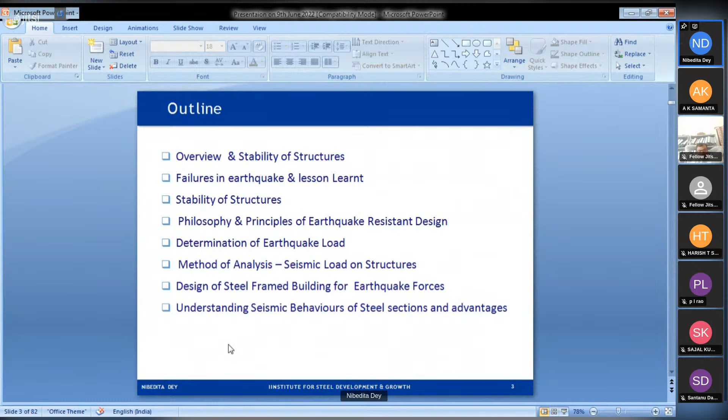First, I will introduce some theories behind the formation of earthquakes, how they occur.

Generally, earthquakes occur along fault lines, cracks in the earth's crust where tectonic plates meet. They occur where plates are subducting, spreading, and slipping, and it is not predictable when this would happen. As the plates grind together, they get stuck and pressure builds up. Finally, the pressure between the plates is so great that they break loose.

The tectonic plates are always slowly moving, but they get stuck at the edges due to friction. When the stress on the edge overcomes the friction, there is an earthquake that releases huge energy in waveforms that travel through the earth's crust and cause the shaking. That is when it can be felt, and that is when we understand that we are having an earthquake.

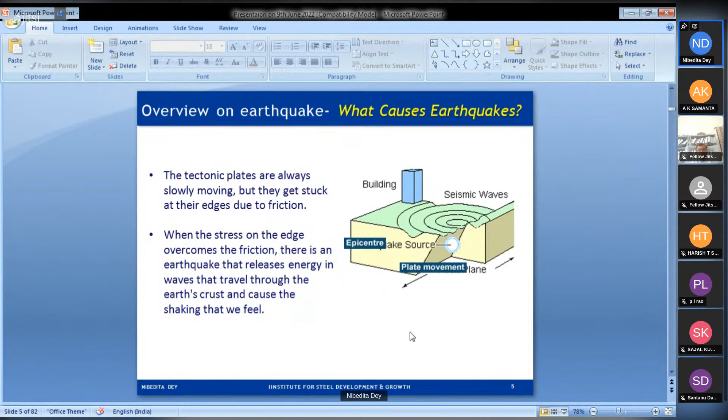Some past earthquakes caused damages and loss of lives. Among the two biggest major earthquakes in respect of death and damages, we can remember the Latur earthquake of 1993, which was considered to have occurred in a very stable region. Generally we think earthquakes occur only in loose soil, but this changed views after the Latur earthquake. It was a very stable zone, but still we felt these major earthquakes.

After the Gujarat earthquake of 2001, many wrong conceptions which were earlier there, that buildings of U shape or L shape are preferable as the different arms in orthogonal direction may give stability, have been proved wrong.

After the earthquake, people who analyzed the effects felt that steel is most suitable for earthquake resistance, as it has the ductility property. Wood is also good for seismic structures due to its lighter weight, but it does not have the ductility property as compared to steel.

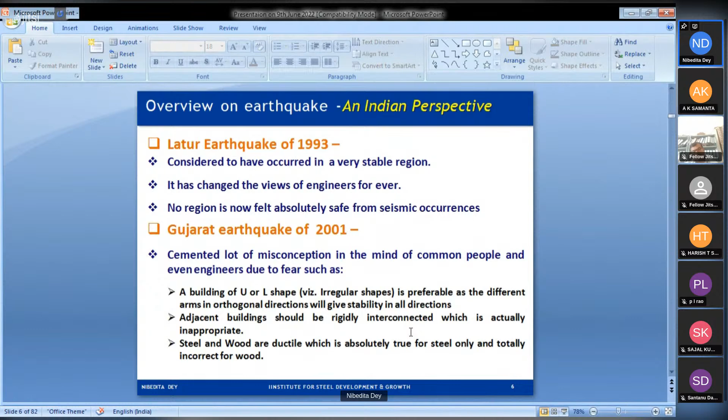It has been proved that even in the low occurrence of earthquakes, structures should have some capacity to resist, so that they should not damage our lives.

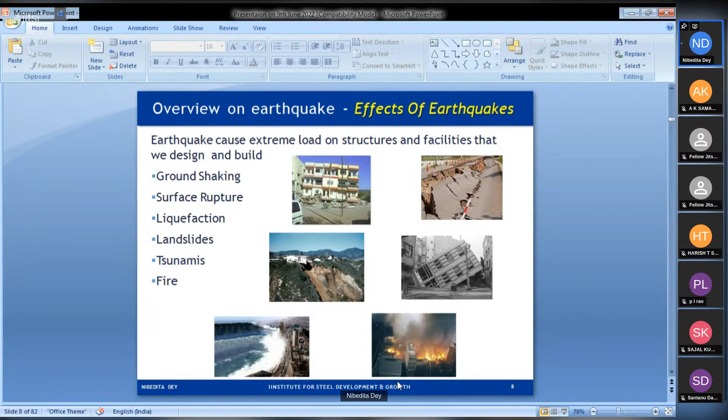So we cannot predict and fully resist all these forces and damages, but we can at least take steps to design buildings to resist to some extent the damages and collapse of human-built structures. Here are some pictures of earthquake failures.

Some steel failures in RC buildings. You can see the failures of corridors, and here you can see the failures in the bracing and the column itself.

Here is a total collapse of one story. Here is a failure due to soft story in the ground floor. Here the failures of bracings, and it is total failure due to liquefaction.

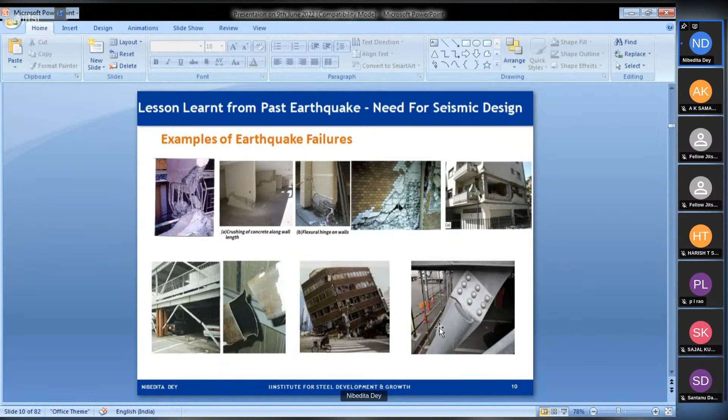Here are some more pictures of the failures. Generally, after the earthquake, when we see the failures and damages, we start to study what the causes are and how structures can be protected in future. So there is a need to study earthquake damages. It provides invaluable information on the performance of real structures under actual earthquakes. It is like a full-scale testing of a variety of prototype structures under real earthquakes.

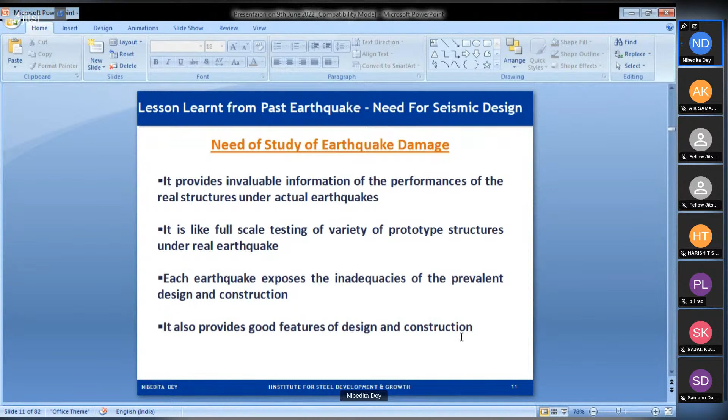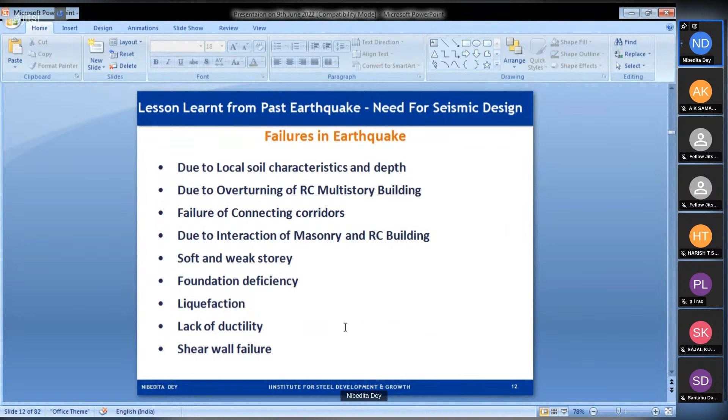Each earthquake exposes the inadequacies of the prevalent design and construction, which we can rectify in our future design. It also reveals good features of design and construction. Failures in earthquakes can happen in many ways: due to soil characteristics and depth of foundation, overturning of RC multistory buildings, failure of connecting corridors, interaction between masonry and RC buildings, soft and weak stories, foundation deficiency, liquefaction, lack of ductility, and failure in the shear walls designed for lateral load.

Now, what can we do? If we design all structures for a massive earthquake, our design may not be economical, because a severe earthquake is not likely to occur frequently during the life of the structure. So we have to judge when designing structures for any earthquake, to resist earthquakes which are not very high but create huge damages. The structure does not collapse, but we see damages which we will be able to repair. So we have to think how to take steps for both types of design.

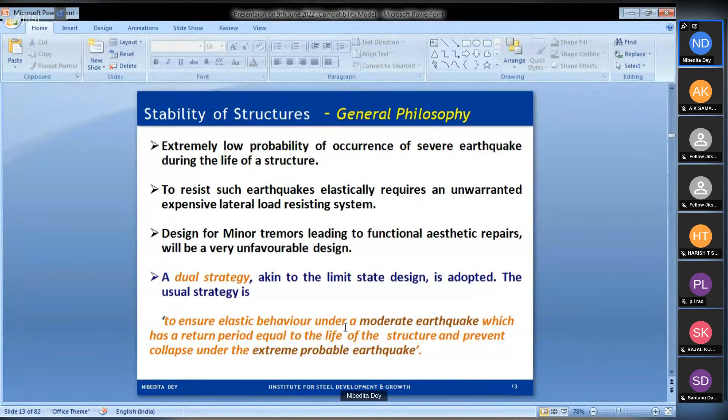So we have to ensure elastic behavior under a moderate earthquake, which has a return period equal to the life of the structure. A moderate earthquake may happen two or three or more times during the life of the structure, but a severe earthquake doesn't have that frequent a return period. So we have to prevent collapse under the extreme probable earthquake, allowing some damage before collapse. We have to ensure the ductility property that allows large deformation without collapse: the ratio between the ultimate deformation at an assumed point of collapse and the deformation at yield point, which means the ductility. I will explain more about ductility in later slides.

Another term we need to understand is hysteretic energy dissipation. It is the energy dissipated by inelastic cyclic deformation. When earthquake load is acting on the lateral load systems, any member first gets loaded and is subjected to some deformation. Like when we plot the stress-strain curve, at first the member is elastic and follows a linear line. After some time it reaches the yield point, and after the yield point, when loaded again, the curve flattens, and at some point it will be flat.

In an earthquake, the load is reversed. At some point the load is in the right direction, then after some time it is in the left direction, the opposite direction. So when the member is loaded on the other side, the curve is on the other side. When it is cycled like this, the area covered by the cycle is the work done, the energy dissipated by inelastic cyclic deformation. This area is very much required for energy dissipation in a lateral load resisting system during the earthquake. It is given by the area within the load-deformation curve, called the hysteretic curve.

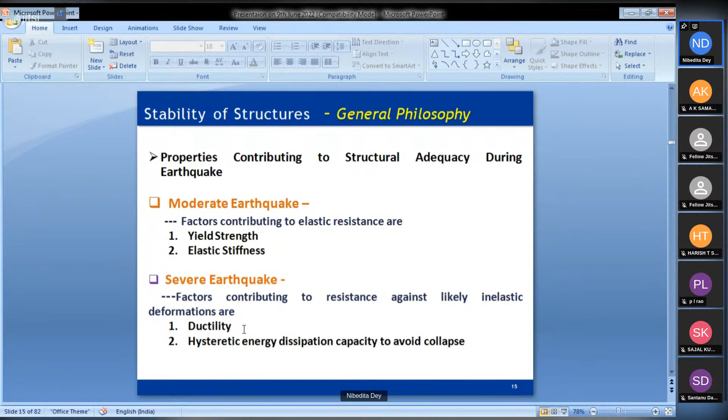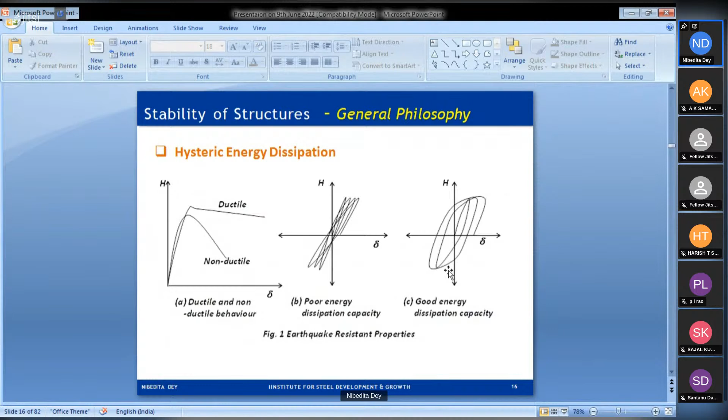Figure 1B shows poor energy dissipation capacity; the cycle lines are very close to one another, so the area under the full curve is smaller. In figure 1C, the area under the hysteretic curve is larger, which means it has good energy dissipation capacity. An earthquake generates energy, and that energy has to be dissipated by the members resisting the earthquake loads, so good energy dissipation capacity is required. One more thing: these curves are taken from different experimental results in some institutes, then included in the literature.

Figure 1B shows the poor energy dissipation capacity, and the structure is likely to collapse due to low cycle fatigue. There is a strength and stiffness degradation under the repeated inelastic cycles, and it is called low cycle fatigue. It is to be ensured the structure is able to dissipate a large amount of hysteretic energy in each cycle, which can minimize the low cycle fatigue effect.

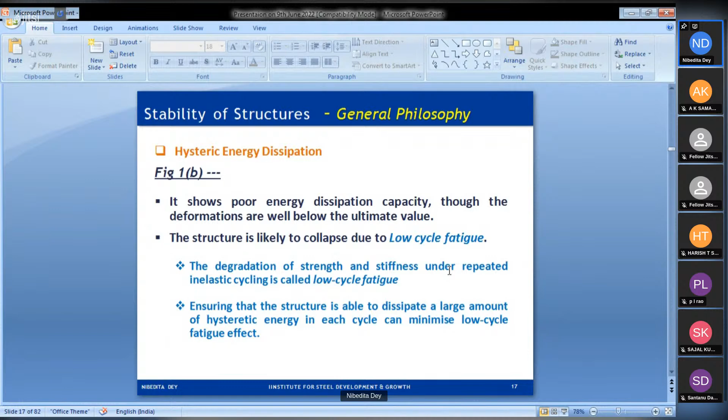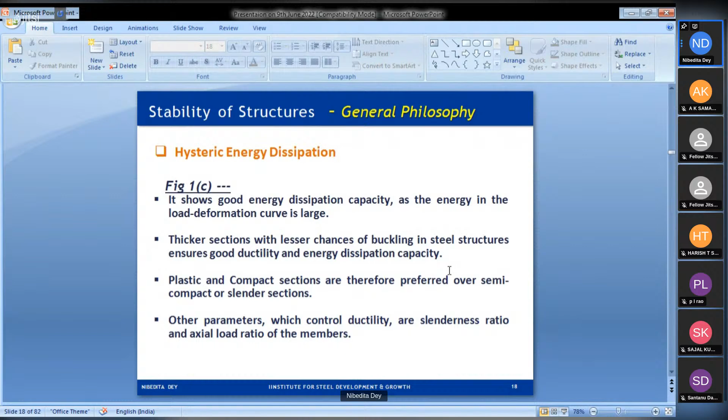Figure 1C: from this, we can tell that a thicker section, which has less chance of buckling in a steel structure, shows good ductility and energy dissipation capacity. Plastic and compact sections are therefore preferred over semi-compact and slender sections. The width to thickness ratio gives the plastic and compact property of sections, and those sections we have to choose. Other control parameters, that is the slenderness ratio and axial load ratio of members, are also required for energy dissipation.

For earthquakes, we need to design our building such that the mass of the structure is less to some extent. Earthquake force is proportional to mass. The greater the mass, the more earthquake force it will attract. So in this regard, RCC structures also resist earthquakes, but compared to the same RCC building, if we design it as a steel building, the steel building will have lesser load compared to concrete. So it will attract lesser earthquake force for the same earthquake frequency.

We also need to be sure that the structure has some symmetry and regularity in plan direction and also in vertical direction. Because non-symmetric and torsionally unbalanced buildings are prone to earthquake damage due to coupled lateral torsional movement, producing non-uniform displacement demands in the building elements and concentration of stresses and forces on structural members. Also, we have to be sure of the strength and overstrength capacity of a building. This overstrength theory I will explain in the later slides. Ductility has already been explained, why it is required.

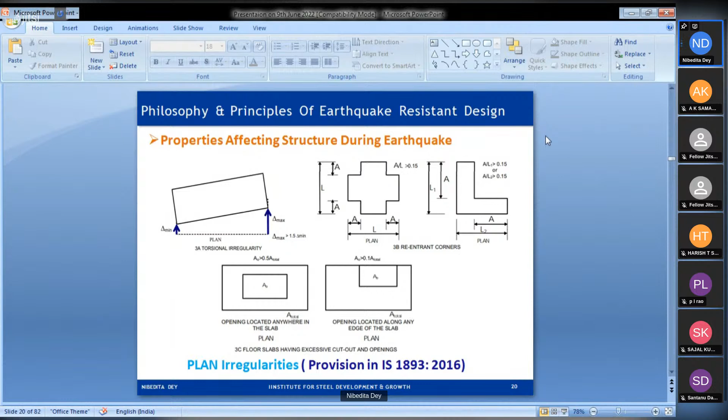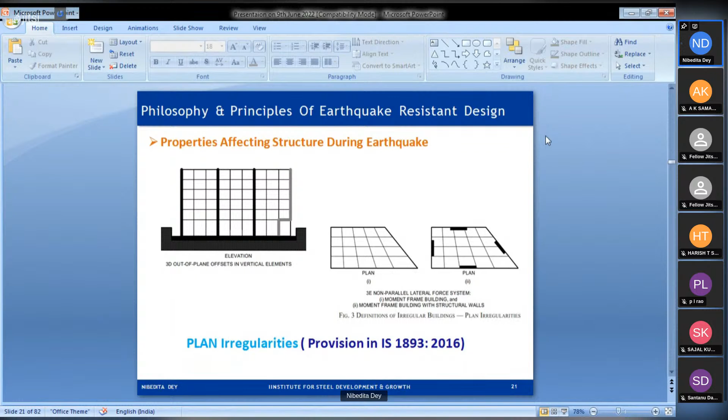Some irregularities in cutouts and floor slabs have also been pointed out in IS 1893:2016. Here again are some provisions for irregularities in plan dimensions. Actually, we have to distribute all the masses in a uniform way throughout the building, and also choose the lateral load resisting system in such a way that its CG is almost coinciding with the CG of the mass, so that there is no eccentricity. Practically, it is not possible many times. For that, the code has given guidelines on what extent of eccentricity we can take. That I will explain in a later slide.

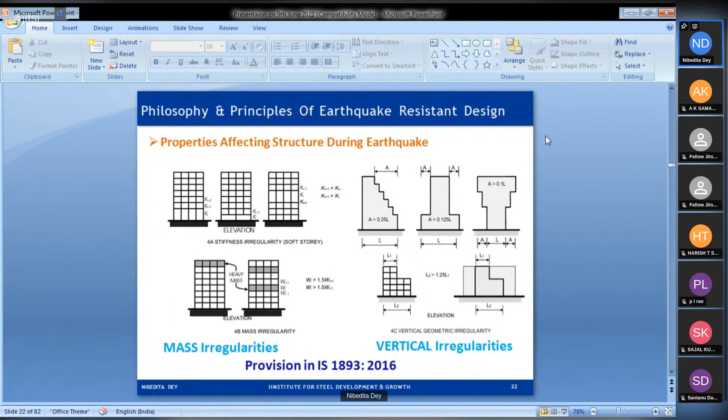There should not be any mass irregularity also. We will try to distribute the mass as uniformly as possible. Lateral, here you have seen that in elevation, in the second picture, there are floating columns. So floating columns should be avoided.

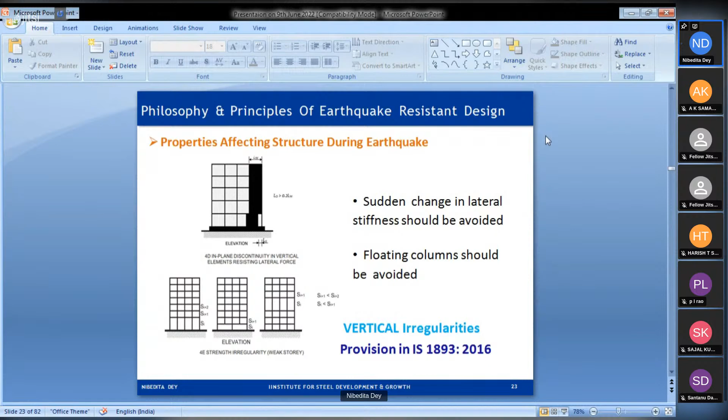In some buildings, floating columns are provided, maybe due to some architectural restrictions, but first it should be avoided. Even when it cannot be avoided, we should design the floor from where it started, and maybe we will choose the adjacent floor if we can provide a truss system between two floors, and the space between these two floors can be accessed for the service lines. In some high-rise buildings, this system is followed when floating columns cannot be avoided due to architectural planning.

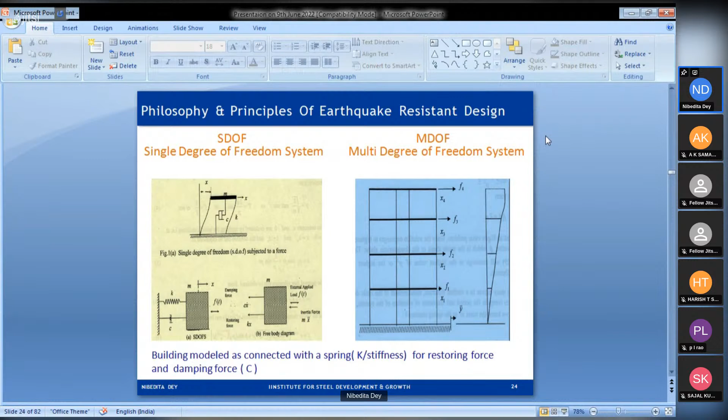Here, a schematic diagram, that is the mass of the structure is lumped at top, shown as M, and the ground acceleration, that is UG, and the structure is displaced due to this vibration. The relative displacement between ground and the mass is the value of U, and UG is ground displacement.

And now we are writing the equation of motion, that is M U double dot. U double dot means the acceleration. C U dot, U dot is the velocity. C is the damping, and K is stiffness into the displacement. So all this together should be resisting the earthquake force. And we use the eigenvalue problem to solve the equation of motion in earthquake analysis.

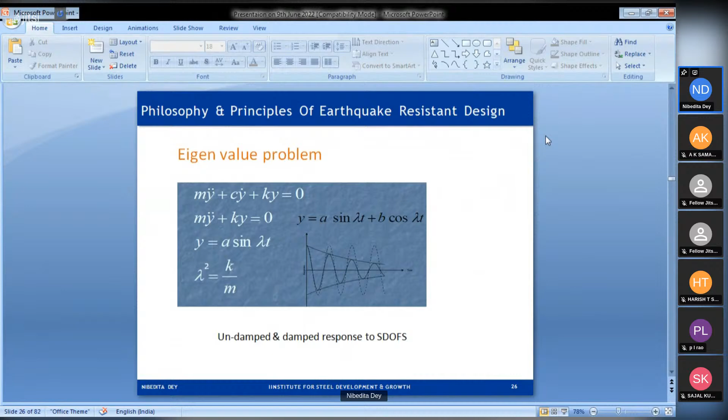Oh, this slide, I think it is repeating. By mistake, the slide has been repeated.

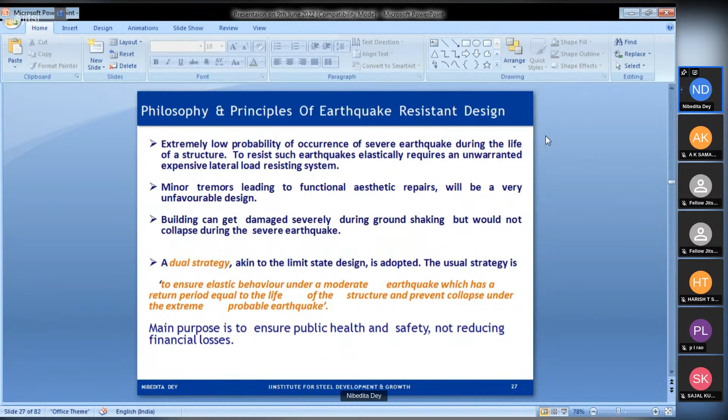Already we have explained that we have to design the structure for the earthquake; for moderate earthquake, the structure should be elastic enough in its return period. And for severe earthquake, we have to allow some damage, but not collapse. We have to ensure the health and safety of the public, and not only reduce the financial losses.

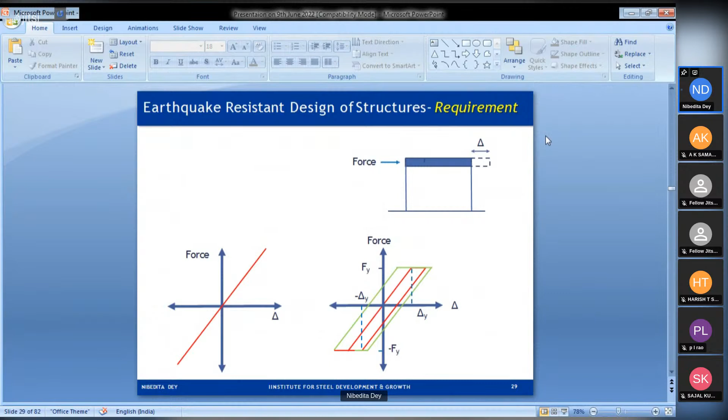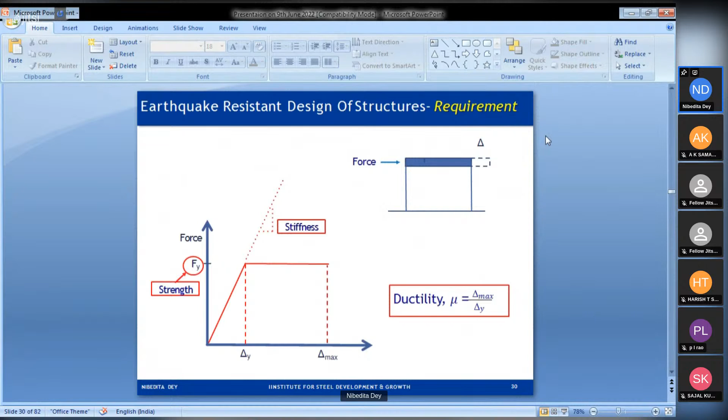How to design for an earthquake load? First, for earthquake load, three things we have to keep in mind. Only choosing the material is not sufficient. Only choosing the lateral load resisting system is not sufficient. We have to also ensure the level of detailing useful for seismic analysis. So we depend on the ductility of the material, ductility of the lateral load resisting system, and the ductility of the connections in buildings.

There are 3 types of ductility we have to ensure. Here you can see the curves for steel members. In the linear part, force versus displacement is linear, that is, stress versus strain is linear. At some point it reaches the elastic point. After that, it goes downward.

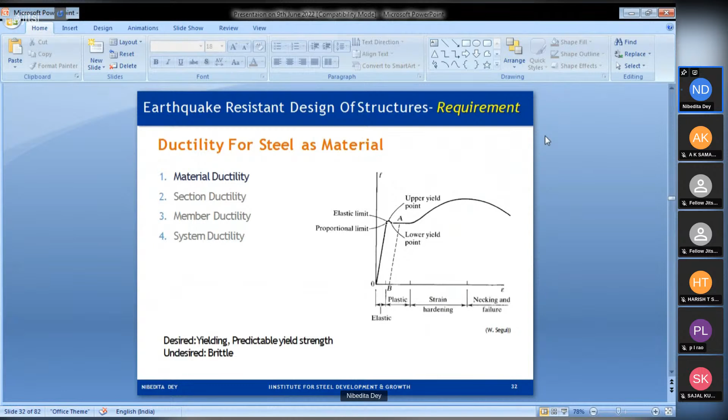Then it gets flattened, reaching the upper yield point. So after the yield point, the zone is plastic. After the lower yield point, the flat part ends. Then there is strain hardening: the load is increasing, the strain develops in the member, and at some point it will fail. So we will choose a member that yields and does not have brittle properties. It will not collapse suddenly.

Then we have to ensure that the section we have chosen, whether it is an I section or hollow section or any other section, is ductile enough, resisting the design earthquake forces we get in a particular structure. Here you can see that when the member is subjected to forces, that is bending moment, for an I section, first the extreme fiber gets stressed due to bending moment. In elastic analysis, we design our member based on reaching Fy in the extreme fiber.

But for the plastic hinge, after the extreme fiber, the next fiber gets stressed to the yield point. Then it progressively reaches the fibers near the neutral axis. Then a rectangular stress block forms, where all the fibers in the compression zone and tension zone are at yield. At that point, the section has reached the plastic hinge point, and the section may rotate. So we have to ensure that our member will not collapse or fail, but will form a plastic hinge.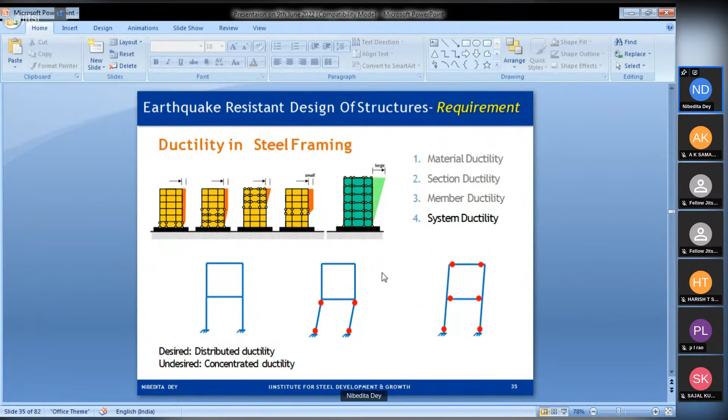Another point we have to analyze in earthquake resistant structures is the response reduction factor. What is that? It is an indication of the extent to which energy is dissipated through inelastic deformation during seismic excitation. In elastic analysis, the force versus displacement curve is straight. For the maximum displacement, the force causing it is V elastic, and we design the structure corresponding to delta Y, the yielding point, which gives V design. The R factor is V elastic divided by V design.

Before designing structures, we think about how much damage we can allow, because for a severe earthquake, designing the structure to be fully robust may not be economically feasible. So we have to use our judgment and design the structure according to the response reduction factor. It depends on the framing system, material, everything. The code gives values for different moment frames and braced frames, different for RC buildings and for steel buildings.

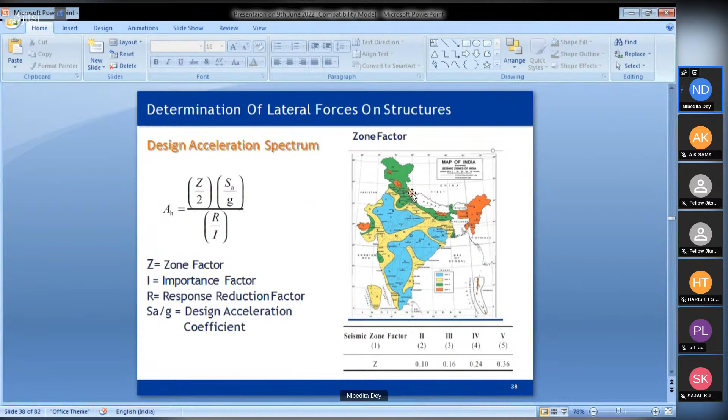Z is for zone factor. We have 4 zones now to be considered in seismic design: 2, 3, 4, and 5. Importance factor depends on the building type. Response reduction factor depends on the building framing system, that is moment frame or braced frame. And the design acceleration coefficient depends on the soil type, whether it is hard soil or loose soil, and also on the natural time period of the structure.

Here you can see the response reduction factor in IS 1893. It gives some factors. Why have I marked it red? Because in this webinar we are concentrating our presentation on steel buildings, so we have highlighted it this way. You can see that for a steel building with ordinary moment resisting frame, our response reduction factor is 3, and for a steel building with special moment resisting frame, the factor is 5.

That means when our load is about some value V, we reduce the value by 1/3 for a steel building with ordinary moment resisting frame, and we reduce the forces by 1/5 for special moment resisting frame. That means the special moment resisting frame is the more effective system for earthquake resistant structures. And similarly there are values for braced frames: building with ordinary braced frame, building with special braced frame, and building with eccentric braced frame.

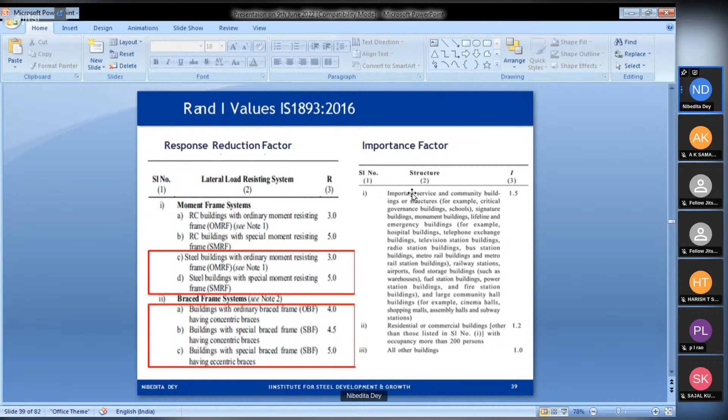And some values of importance factor are also given for the use of the building, for the importance of the building. For residential or commercial buildings it gives a value of 1.2, but for other buildings like a rail station, where damages and toll of lives may be greater for any collapse, the importance factor is 1.5. That is, we have to design for more earthquake forces. But for other general buildings, we can use the importance factor as 1.

Here are 2 Sa by g curves. One is the spectrum for the equivalent static method, which we will explain in the later slides. And the second one is for the response spectrum method. Design acceleration coefficient Sa by g.

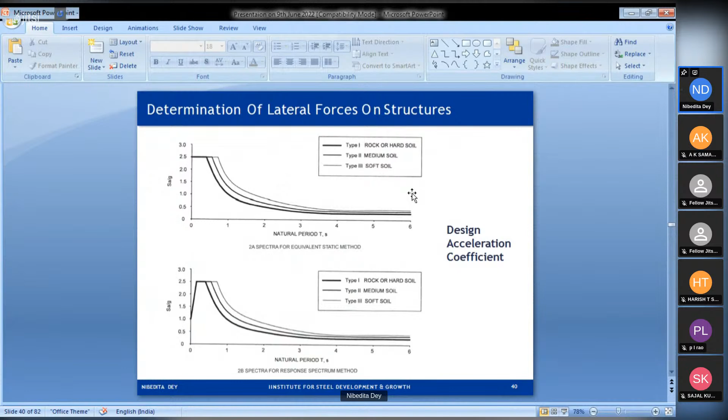Now, method of analysis for seismic loads. The code has specified 2 methods for earthquake load analysis. One is the static analysis method and the other is the linear dynamic analysis method. The static analysis method is the equivalent static method, and it is applicable for regular buildings less than 15 meters in seismic zone 2. And also we have to see whether the natural time period of the structure is less than 0.4 or not.

The linear dynamic analysis method is not required for regular buildings less than 15 meters in seismic zone 2. In other zones, seismic zones 3, 4, 5, we have to analyze the structure with linear dynamic analysis. For linear dynamic analysis there are two methods, that is the response spectrum method and the time history or site specific method. Another is non-linear dynamic analysis. It is not included in the provisions of IS 1893.

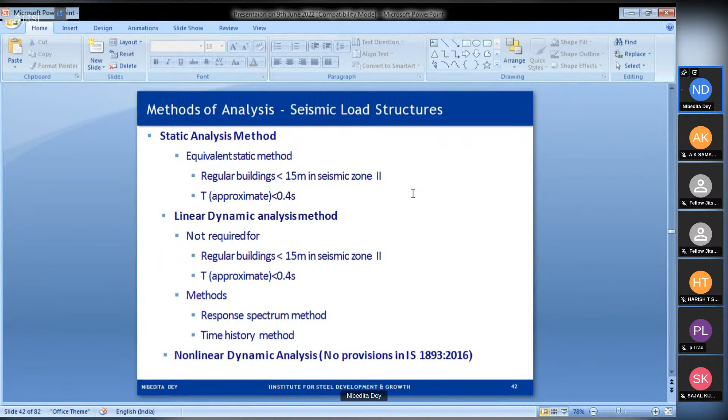In the equivalent static method, the Ah value is the same as we have seen in the earlier slide, that is Z by 2 into Sa by g by R by I. And the minimum design lateral force VB is equal to Ah into the seismic weight of the building. After getting the seismic weight of the building, we have to distribute the seismic force to each floor depending on the formula for Qi, which depends on the individual weight of each floor and the height of the respective floor from the ground level.

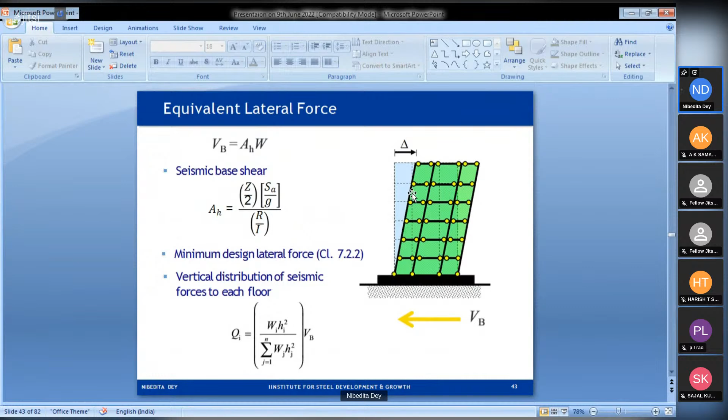And in linear dynamic analysis, the structure is analyzed for several vibration modes. The structure is supposed to vibrate in different modes, like the first mode of vibration, second mode of vibration, third, and many other modes. So all these modes are considered in linear dynamic analysis.

The code has specified that the design base shear calculated using linear dynamic analysis, VBD, should not be less than the design base shear calculated using the fundamental natural period Ta in the equivalent lateral force method, VBS. VBD should be greater than VBS, and if VBD is less than VBS, the force response quantities shall be multiplied by the factor VBS by VBD. And all the story shears, base reactions, all these forces will be multiplied in the same ratio.

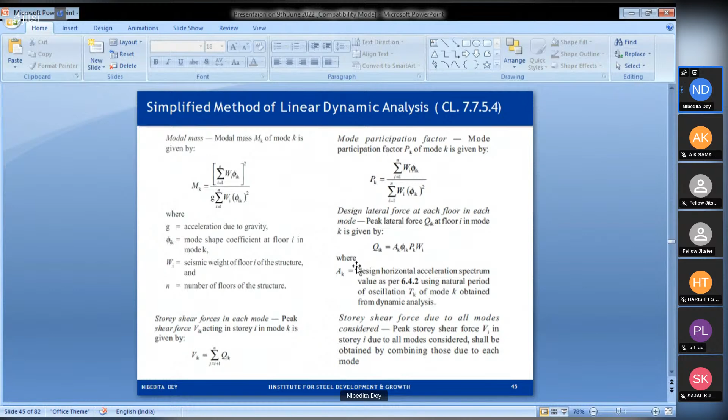Here, the design acceleration spectrum for response spectrum method. The difference with equivalent static method is that for zero natural period, in equivalent static method there is a fixed value of SA/G, that is 2.5. But here it is lesser than 2.5, and it is also increasing from zero as the value increases. Sometimes we use site specific design acceleration spectrum depending on the requirement of the structural design and the project.

The code has specified that when we are using a number of modes in a direction, the sum of modal masses contributing to earthquake force generation should be 90% of total seismic mass. After the software analysis, we can see from the output all the modal masses in each mode - the total modal masses should be 90% of total seismic masses of the building.

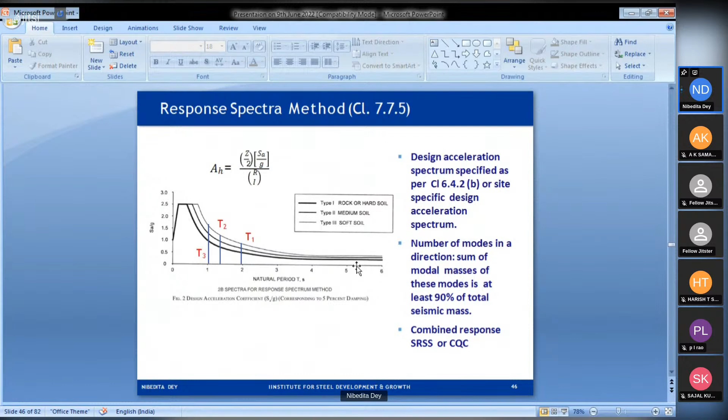Another system we have to ensure is that when designing the lateral load resisting system, the earthquake forces are finally transferred by this system. But how do these forces go to the lateral load resisting system? For that, the building floor needs to act as a rigid diaphragm in the lateral load resisting system, so that force is transferred from one framing column to another through the building floor slabs, and this is most effective when the building floor acts as a rigid floor.

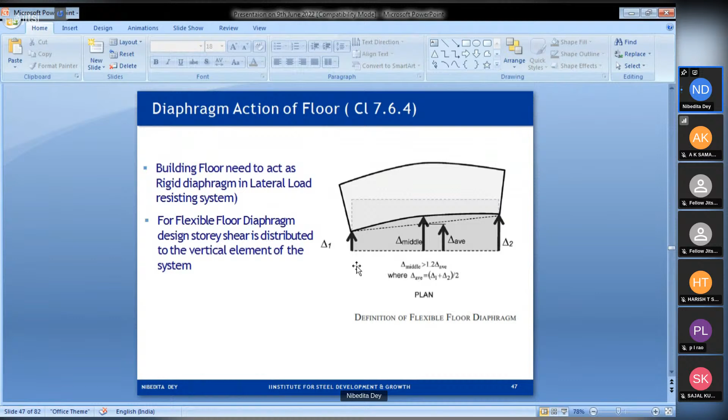If it is not possible, if it is to some extent flexible, we have to check how much it is flexible. The code has guided us to check flexibility of the floor diaphragm, what value is allowed. In the figure, the delta middle displacement of the floor should be greater than 1.2 delta average. So we are allowing that flexibility of the diaphragm to be considered in lateral load resisting system design.

One point we have to ensure is design eccentricity. In analyzing the structure, while giving input, we have to give that eccentricity value. What is eccentricity? It is the distance between the center of mass and center of the resisting system, like where we provide braced frames, shear walls, or any other load resisting system. If we are designing moment resisting frames, we calculate the CG of the lateral load resisting system, which should coincide to the most extent possible with the center of gravity of the mass, so there is no eccentricity and the force acting gets resisted fully.

Even if there is eccentricity, the allowable value given in the code is 1.5 esi plus 0.05 bi. That 0.05 value is for the accidental eccentricity.

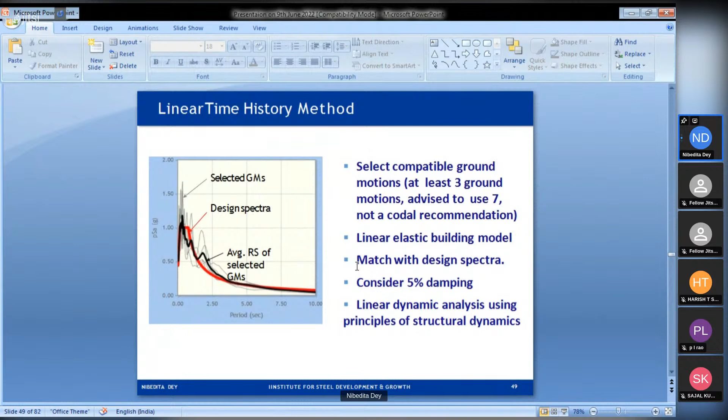Some drift requirement is specified in the code. Why is it required? After an earthquake, we always see some tilting of the structures. Even if there is no collapse, it has been tilted, and it gets damaged when the building, getting tilted, falls on the other buildings. So for that, the pounding effect should be restricted.

What is the pounding effect? It simply means the collision of two buildings due to earthquake load, and it happens due to irregular response of the adjacent floors of the buildings during the earthquake. So to resist that, when we are designing different units of a building or any separate two buildings, some separation should be there.

That separation value is R1 delta 1 plus R2 delta 2. R1 delta 1 is for the first building, and R2 delta 2 is the corresponding response spectrum value and displacement value of the second building.

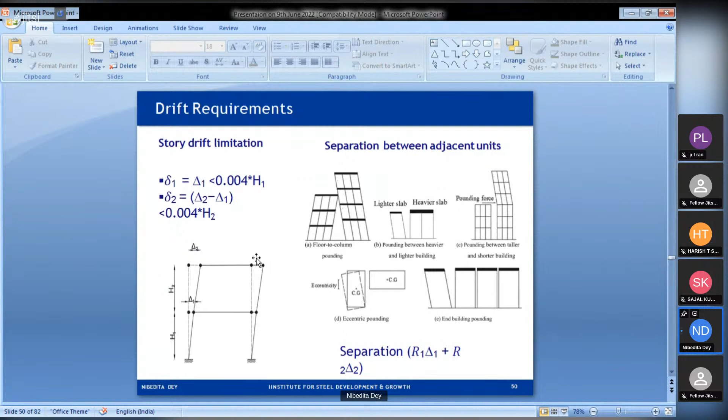Other than designing the lateral load resisting systems for earthquake, all other members which are not acting as earthquake load resisting members should also have the required bending moment and shear force capacity for all the design forces they are acting under.

This is mentioned in clause 7.11.1, and these forces should be delta multiplied by the response spectrum value of that particular building. It is specified to design in this way in zones 3, 4 and 5.

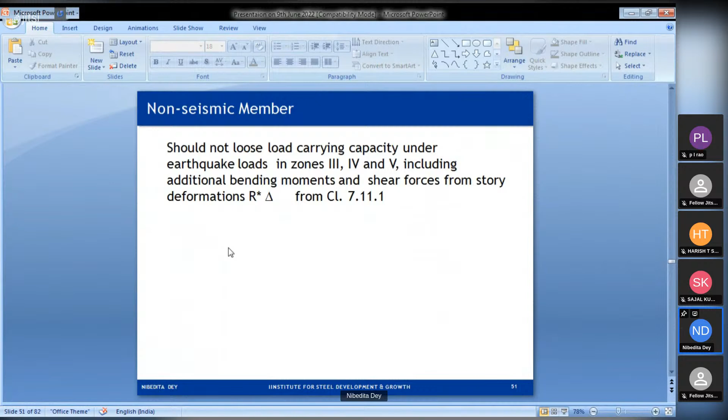So here, in short form, are the clauses we have to remember and follow for the earthquake load resisting system. Horizontal diaphragm design, as explained in the earlier slide, is clause 7.4 to follow the 7.6.4 guideline.

Design for horizontal and vertical loads includes the torsion requirement, that is the eccentricity part, and the structural irregularity part in tables 5 and 6. We have to see the projection part also in the planning of the building from the start, and addition to existing structures is mentioned in 6.1.7, along with any change in occupancy that we have to consider while analyzing the building.

In today's presentation, we are restricted to the lateral load resisting system only, but there are some clauses on foundation design for earthquake load analysis, that is clause number 7.12.1, and for compound walls there is a clause in 7.12.3.

The connection between parts is also very relevant in this system design, mentioned in 7.12.4, because sometimes corridors or connecting parts fail during earthquakes because they are not designed for their full capacity.

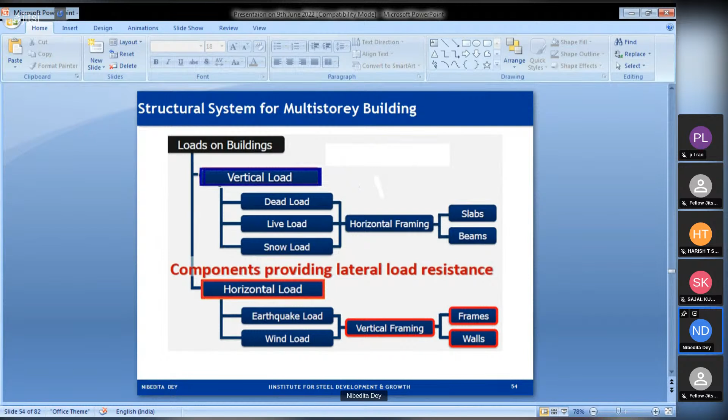There are two types of moment frames: ordinary moment resisting frames and special moment resisting frames. And there are four types of braced frames: ordinary concentrically braced frame, specially concentrically braced frame, eccentrically braced frame, and buckling restrained braced frames.

In special moment frames, beams and columns have moment resisting connections. It resists forces by flexure and shear in beams and columns. In this moment frame design, we always follow the principle of designing the beam such that the plastic hinge forms in the beam first, not in the columns. We follow the theory of strong column, weak beam to resist the earthquake forces.

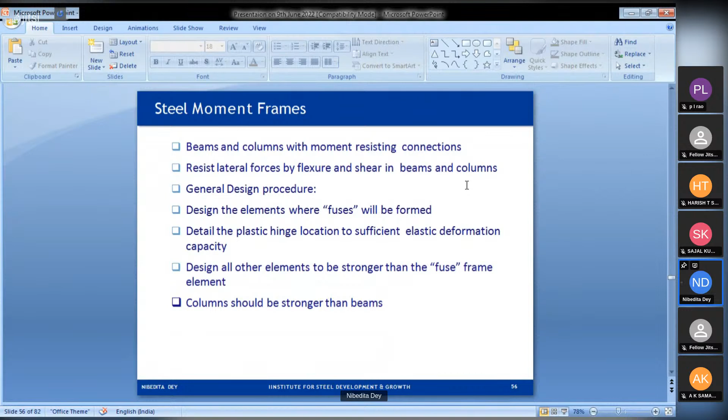Here in the figure, you can see that we are forcing the beam to get the plastic hinge rotation point first, before the column. We have to ensure how we can ensure this.

Sometimes we ensure the hinge formation to be in the beam by reducing the beam flange section at that point, as the beam flange is taking the moment load. So we can reduce the beam flange so that it will reach the plastic moment capacity of that section, it will act as a hinge point. But at the same point, the other sections adjacent to the members and the columns will be designed for more than the capacity of that plastic hinge point, so that all other sections don't collapse or fail before the plastic hinge formation.

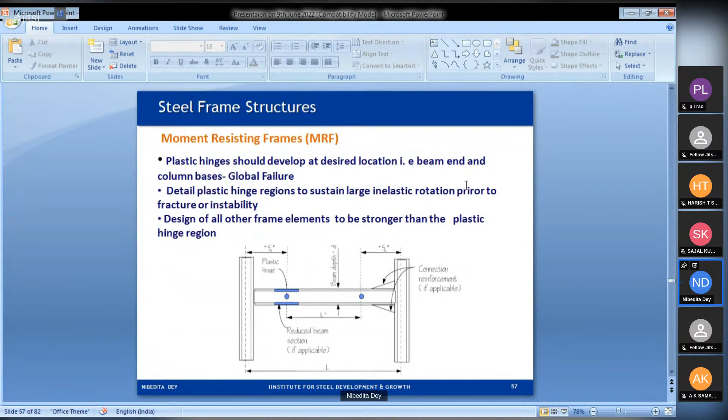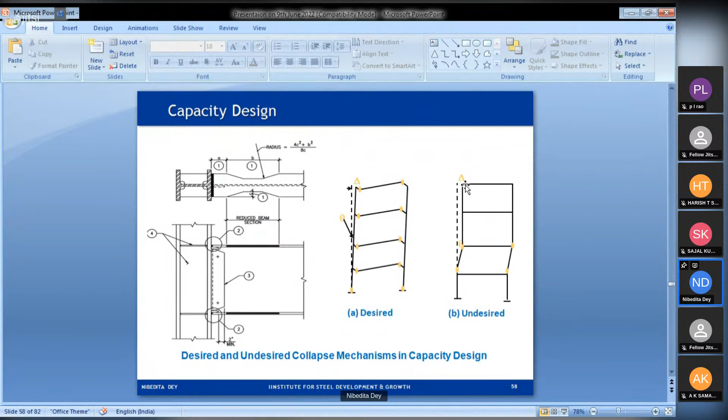And the same concept we have to follow for all the beams for the moment frame used to resist the lateral load resisting system. We will allow all the beam parts of the frame to get hinged first, not the column.

Here, the strong column weak beam theory is explained in the figure. In the left figure, all the beams are getting the plastic hinge formation, so the frame can sway, but it will not collapse. But in the right figure, when the column will get the hinge point, after the hinge point formation, the frame gets collapsed without any indication.

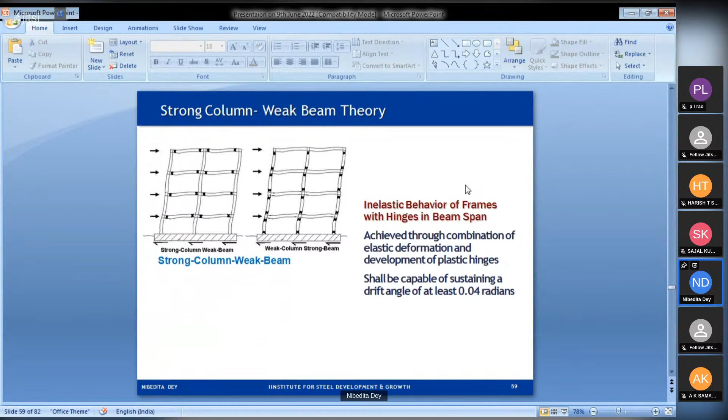Concentrically braced frame is not as ductile compared to moment resisting frames, but again it depends on how important the structure is and in which zone we are designing the structure. Considering all these factors, we choose the structural load resisting system for earthquake. These frames are not as ductile as moment frames, but we can use them in seismic zone 2 and 3.

Eccentrically braced frame is much more effective than concentrically braced frame, as we can have a link between the framing members, that we can use to fail first before all other members in the framing, so that the framing becomes ductile, that is, it deforms first before collapsing.

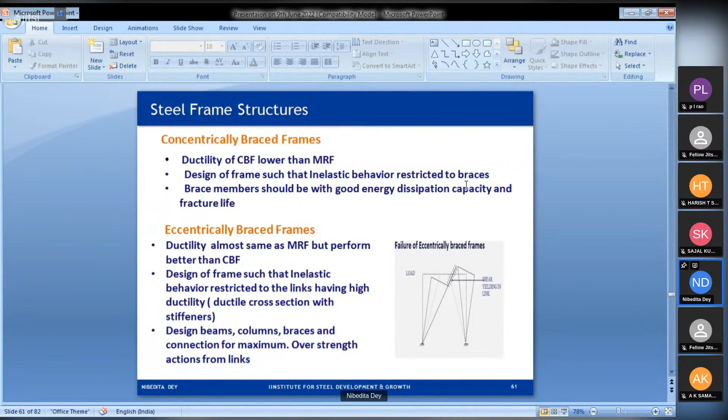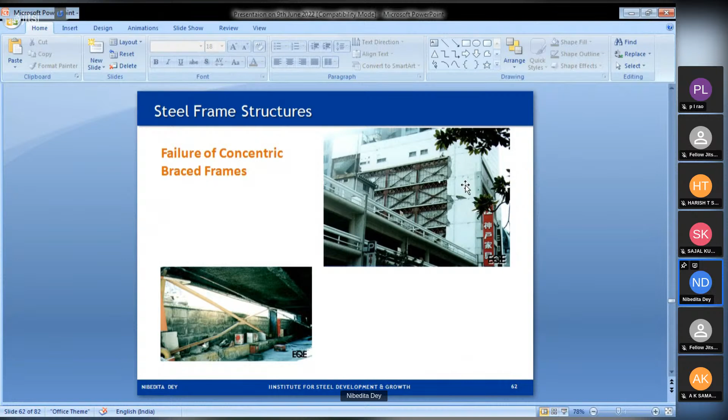Ordinary moment resisting frames, as per clause 12.10 of IS 800 2007, are not allowed in zone 3, 4, and 5, and connections are as per clause 12.10.2. That is, connections are permitted to be rigid or semi-rigid moment connections, and they satisfy all the criteria of 12.10.1.

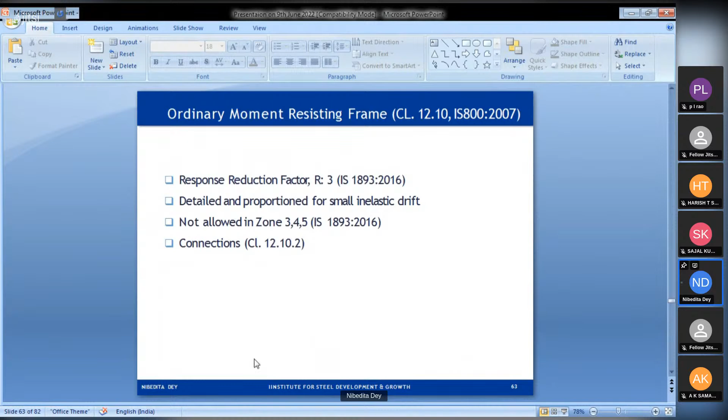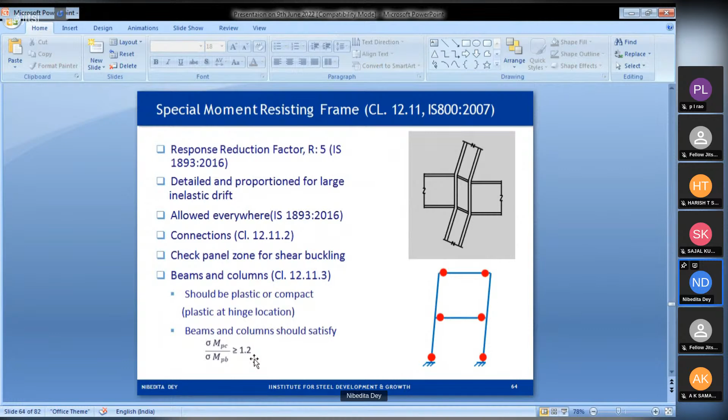And here the design should be such that the plastic moment of column and beam should satisfy sigma MPC by sigma MPB greater than or equal to 1.2. That is, column moment is always greater than the beam moment capacity. That's why the beam gets the plastic hinge point first. And also the shear buckling check is done for the panel zone.

Now it is showing the concentrically braced frame. In this framing, beams, columns, and bracings are arranged to form a vertical truss, and it resists the earthquake forces by truss action.

And here we allow the bracing member to fail first before the other members of the frame, that is beam and column. The bracing yields in tension first before it buckles in compression, so that the structure should not collapse.

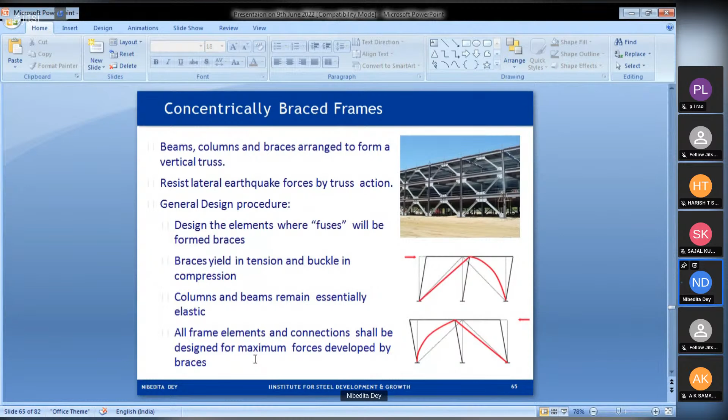Ordinary concentrically braced frames - some provisional code provisions are there: for ordinary braced frames, concentrically braced frames, slender sections are not allowed, and axial compression, which we design the section for, should be less than 0.8 of design forces, and slenderness should not be greater than 120.

As we are saying that it should yield in tension first, that's why this slenderness ratio and this axial compression value is mentioned. That is, P design is the compressive force, and this axial compression is 0.8 times of P design.

And for connections, the connection part should be designed as 1.2 times of FYAG for tension, and also the connection member should be designed for 1.2 times of the plastic moment of the beam section. Connections are also checked for net tensile rupture, block shear, and the gusset should be checked for out of plane buckling.

And for specially concentrically braced frame, the connection design guideline is as per clause 12.8 of IS 800, and response reduction factor for this particular frame is 4.5, and this frame is allowed in all the zones. That is, zone 2 is always allowed, and for 3, 4, 5 we can choose this framing for the lateral load resisting system.

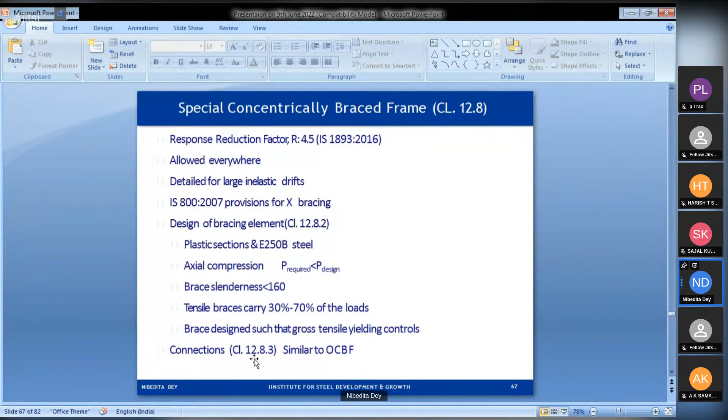And when we are designing the member for compression, at the same time we have to design it for tensile bracing, as the load is reversing. When the member is acting in tension, maybe it will act in compression the next time. So for tensile braces also we have to design the member for 30 to 70% of the load. And connection is same as ordinary concentric bracing, that is the plastic moment capacity has to be considered, and the connection should be designed for 1.2 times of plastic moment of the member.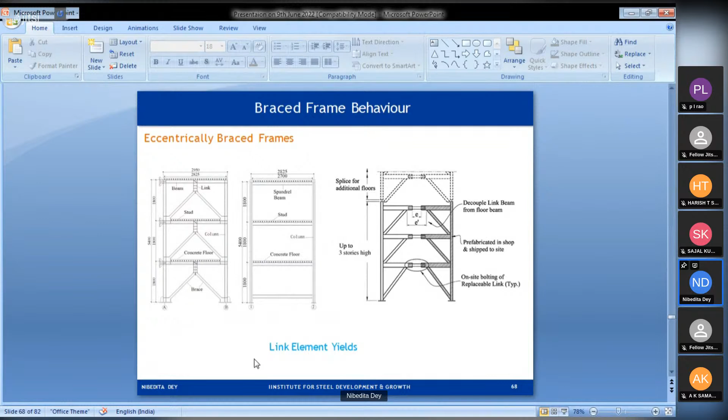And same theory is for the vertical links also. In these two systems, the bracing will not fail, but the link can fail. That is, we are allowing and assuming the structure to behave so in earthquake load. There are some more figures just to understand in a better way: concentric bracing, then the buckling-restrained bracing and link beam in the eccentrically braced frame.

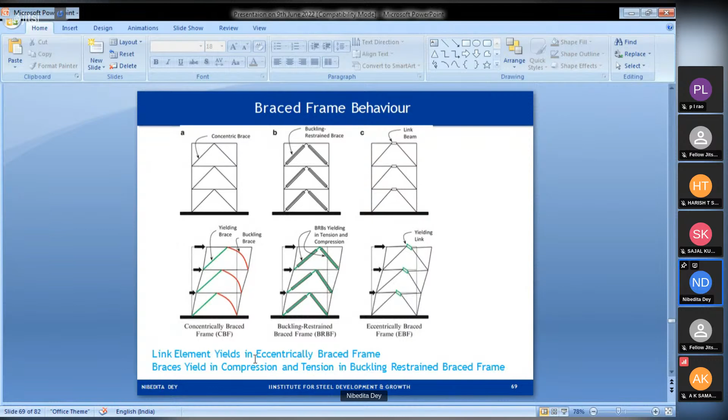Now, for steel structure, as this presentation is specifically concentrating on steel design for earthquake, we will mention that steel is a strong material for its ductile property, which is very much used in seismic design of any steel structure. And we know steel is strong in tension, but when we design for some compressive value, it will buckle before it fails. And steel members are produced with high quality control, and steel structures have flexibility and lower mass, which will attract lesser earthquake forces.

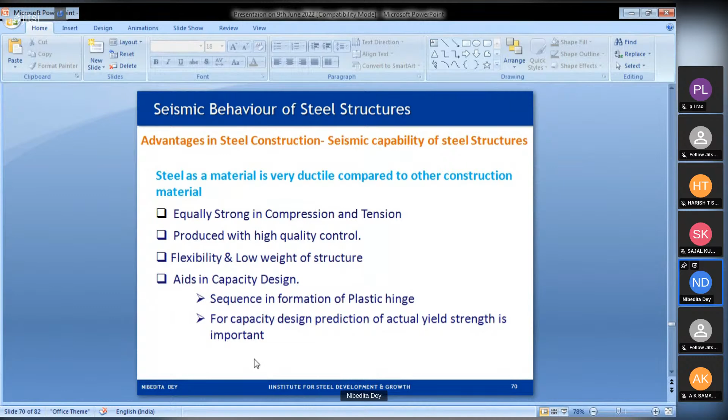And also we can use the capacity design method, and we can sequence the plastic hinge formation, so that we can ensure that the beams get the formation of plastic hinge first. All the beams of any framing system get the plastic hinge first, then the columns, so that it will not collapse.

Sometimes it is followed by the initiation of cracks at the flange web junction, but we can design the connections in such a way that it will be avoided. Some more theory of response of I sections under seismic load: due to local buckling, strength of the members is reduced, and pinching of hysteretic curve after crack initiation can be observed.

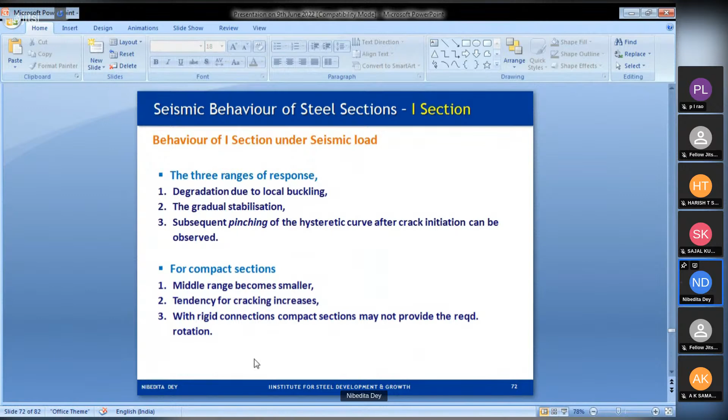But for compact sections, this tendency of cracking increases. With rigid connections, compact section may not provide the required rotation. So we have to keep it in mind. The hollow section also has good ductility property, as it is hot rolled or fabricated with 4 plates welded together.

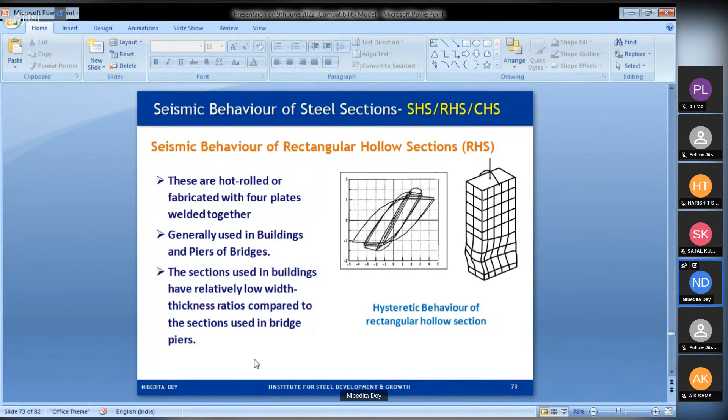These sections have a low width-to-thickness ratio compared to sections used in bridge piers. And these sections scored over the I section due to the fact that there are no outstands, and consequently the ultimate strengths are higher, and post-buckling performance is also better. And as you have seen, the hysteretic loop shape is similar to that of the I section. And in case of a higher width-to-thickness ratio, the section degradation in strength with cycling is considerable.

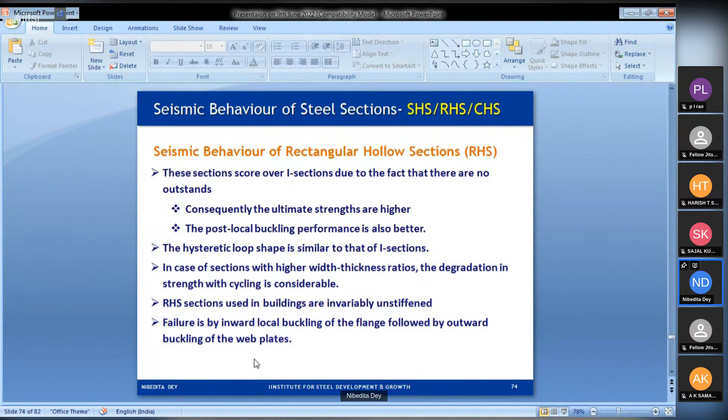So we will keep in mind to keep it as low as we can. And the failure of this section is by inward buckling of the flanges, followed by outward buckling of the web plates. Here is how failure occurs for an earthquake-loaded circular hollow section. Unlike RHS, CHS are more difficult to connect to I sections of beams, and may require elaborate external stiffeners to achieve a ductile connection. Connections are sometimes really a problem for hollow sections, which are easy for I sections.

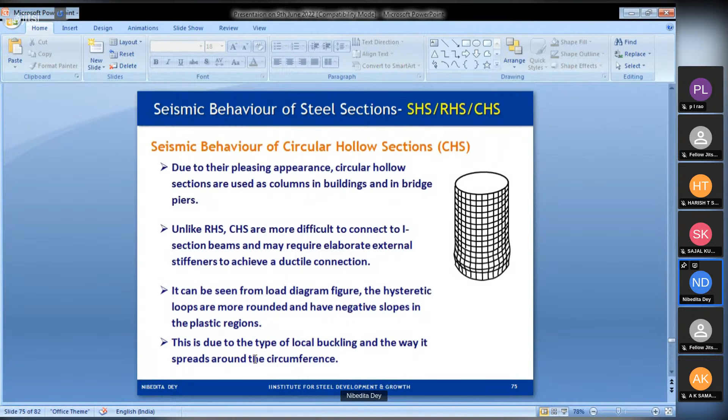And it can be seen from the load diagram figure that hysteretic loops are more rounded and have negative slopes in the plastic region. This is due to the type of local buckling and the way it spreads around the circumference. When a CHS section is subjected to bending in one direction, the part under compression develops local buckling outwards. As the bending moment is increased, the local buckling spreads along the circumference of the tube, since there are no webs to arrest the spread like in the RHS section. If a bending moment is applied in the opposite direction, a similar local buckling develops and finally merges with the previously developed local buckling to form what is known as ring-type local buckling. So sometimes we see that CHS sections fail in earthquake loading.

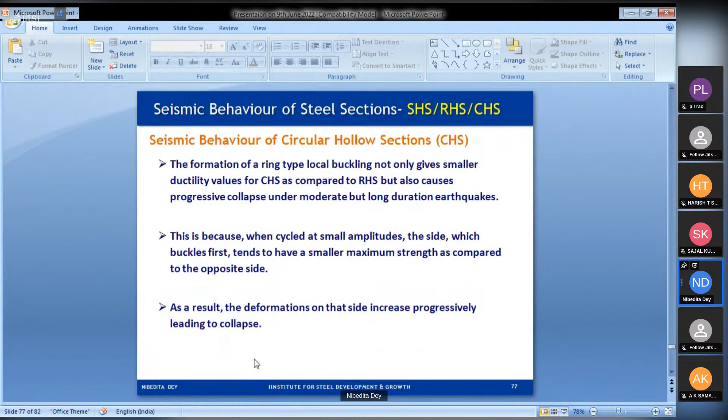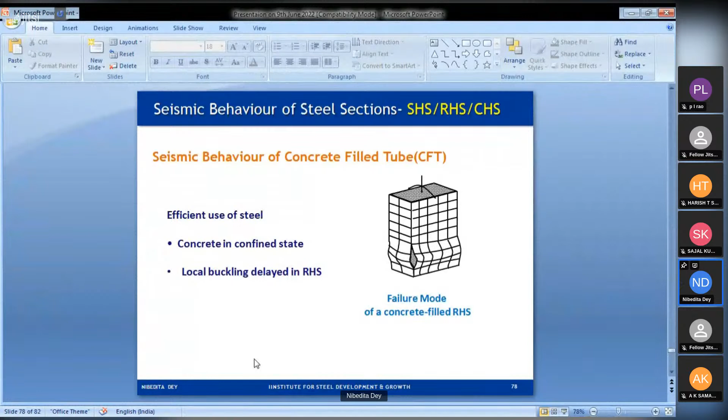Some more theory of seismic behavior of circular sections: the formation of ring-type local buckling not only gives smaller ductility values for CHS as compared to RHS, but also causes progressive collapse under moderate but long-duration earthquakes. This is because when cycled at low amplitude, the side which buckles first tends to have smaller maximum strength compared to the opposite side. As a result, the deformations on that side increase progressively, leading to collapse. Here we can see the failure mode of a concrete-filled RHS; the concrete is in a confined state and local buckling is delayed in RHS. So it is an effective member for earthquakes.

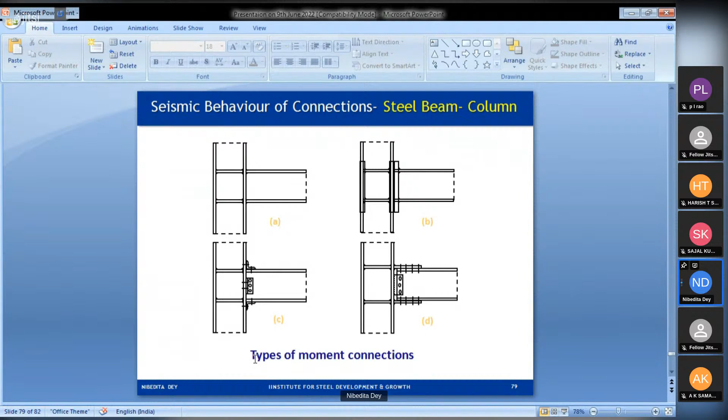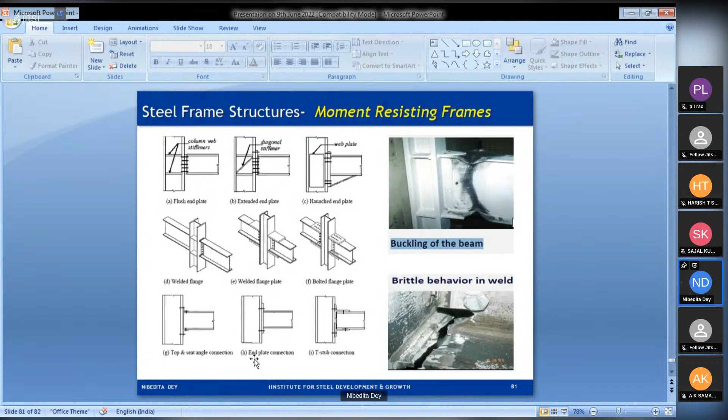Here I have just shown some connections which are used in moment connections for earthquake load analysis, just to show some pictures of how the connection is done and how it fails, how the beam has failed in buckling, and sometimes the weld may fail due to its brittleness. So we have to be very careful designing the weld for the connection.

So this is all about some theories and principles behind earthquake analysis. There are so many things that maybe have not been covered in the presentation, but still I have tried to explain some basic theories in earthquake resistant design. And thank you for listening.

Thank you, madam. I think it was a wonderful explanation on earthquake resistant design. Madam, you have highlighted points on the general philosophy of design, then the shape of the building, then the provisions in IS 1893-2016. Then you have also explained the behavior of frames with bracings, various kinds of bracings, then the behavior of individual structural elements. Madam, we have a few questions. How do we do analysis and design of these concrete filled tube structures?

So let me be very frank. Madam, you can exit from this presentation mode. Okay. Stop sharing, I am doing it. Yeah. So is it okay now? Yeah, okay, madam. You can switch on the video. Okay.